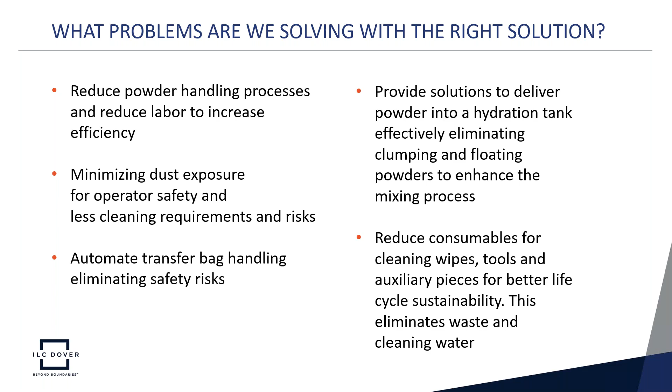Why are there different solutions for powder handling? These are some of the issues we found throughout the biopharm market. Tank sizes and elevations for access to those tanks and the charge nozzles are different. We have some tanks that are smaller and closer to ground level, while other tanks are very large and located on a mezzanine.

So we have to come up with a range of solutions for those differences. The recipes for the volume and types of media are different for each biologic, and so the transfer system needs to be flexible to meet those differences.

Powders definitely have different characteristics causing flow issues, mass flow issues, clumping of the powders, and when it comes to hydration, foaming is an issue. So we looked at that and what solutions can be applied.

Powders will have different mixing characteristics, and so we definitely want to improve how the mixing can be done and have a better mixing profile or speed of mixing.

And the biomarket continues to migrate from durable technology to single-use systems, so the different solutions have to be capable of a retrofit as we look at moving from a stainless steel type of system to a single-use type of system.

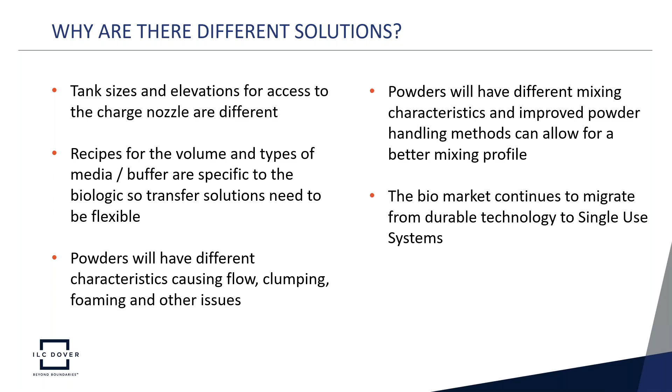So today we'll look at three different technologies that can be implemented for better powder handling. The first is the 2-ported 3-dimensional powder bag, the EZ BioPac. This is understood to be the fastest and most accurate way to dispense powders into a transfer bag.

Second, knowing that a transfer bag isn't always used, there's the technique of drum charging, where full drums are charged into a tank using a drum lifter drum inverter, as shown in the picture. Here the cone liner was developed to protect the cone as part of the drum inverter. We eliminate the butterfly valve, protect the cone, and eliminate cleaning of those components.

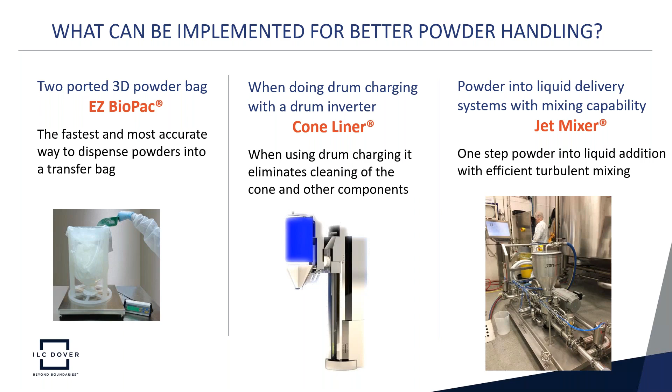And then we have the Jet Mixer, a very novel, unique powder-into-liquid delivery system with mixing capabilities. This uses turbulent mixing instead of vortex mixing, and is a very efficient and effective way to do one-step powder-into-liquid mixing.

There's often limited space, so let's look at what the operator needs. Here we have a 25-liter EZ BioPac in a very compact space, because with a 3-dimensional bag, the volume per inch of height is much greater than a 2-dimensional bag. You can see it's very ergonomic, going from top to bottom only 40 inches for the filling process, giving a large open target for filling quickly, which also allows adjustment if overfilled. The operator can remove powder very easily, no extra funnel or tools required, and spillage is almost eliminated, so we don't get powder into the environment.

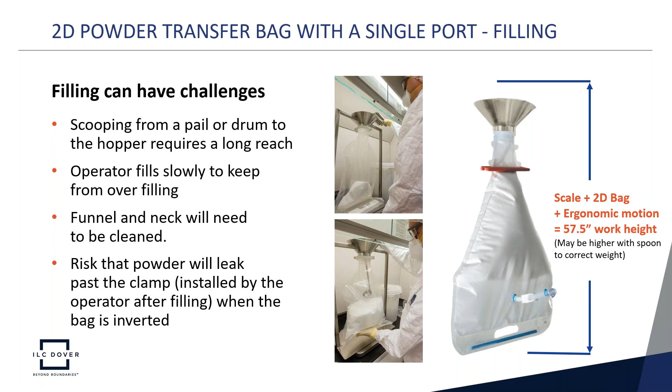Eliminating any parts, any cleaning, and any risks is all part of the powder transfer process. With the EZ BioPac, we recognize that the typical connection, almost 100% of the time, is a tri-clamp connection at the hydration tank or whatever tank it's going into.

The tri-clamp connection is a technology developed in the dairy industry for liquid applications, and it comes with a loose sanitary gasket to ensure a liquid-tight seal. But here, on the powder side of the biopharmaceutical market, we don't really have that challenge of a liquid—we have a solid, the powder, that's flowing.

So the EZ BioPac was developed to integrate that gasket as part of the tri-clamp flange. This eliminates the risk of a loose gasket—say that gasket falls on the floor, the operator probably needs a spare ready, or has to go to stores to get another one. There's also a risk of that gasket getting into the process. That's a worst case scenario, but eliminating that gasket altogether is a key point and benefit of the EZ BioPac.

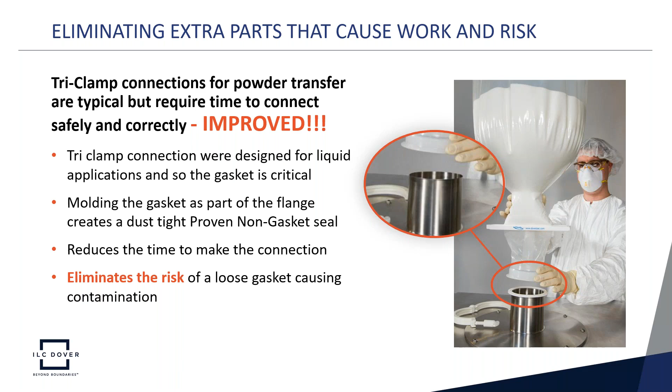Taking a deep dive into that gasket, it really is important, because we do need a dust-tight transfer of powder into the tank. We get this with the integral co-molded gasket built into the tri-clamp.

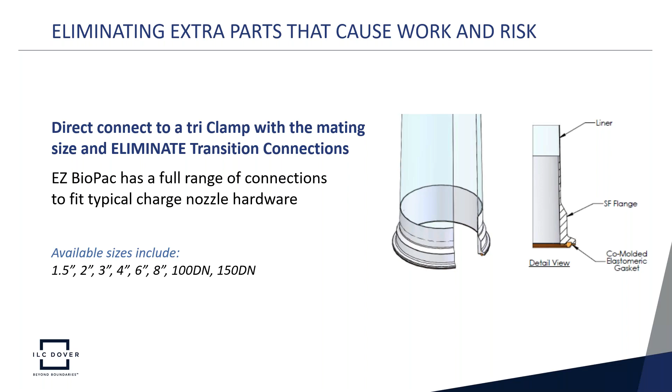The tri-clamps with the EZ BioPac are available in a full range of sizes: 1.5 inch, 2 inch, 3 inch, 4 inch, 6 inch, 8 inch, and some European standards, the 100 DN and 150 DN. This is critical because the EZ BioPac can be adapted to almost any tank with one of these sizes, without requiring any transition connection to meet the tank's size. So the EZ BioPac comes ready to connect directly to the hydration tank.

Powder hang-up and retention in the transfer is also a critical issue. When we look at the filling process, filling a powder transfer bag has a very tight tolerance applied to it. So why apply a tight tolerance to the filling if we're going to lose a significant amount during the transfer? In a two-dimensional bag, the loss is really retention in the powder bag, because of how the bag is welded together. The welds are similar to what a pillowcase would be, with pinch seam welds coming down the side—areas where powder can hang up. So why go through the diligence of a very accurate fill if we might lose 100, 200, 300 grams?

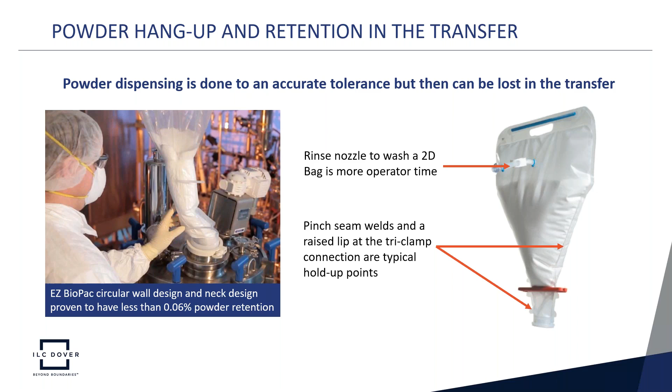The two-dimensional bags do have a solution for that, the rinse nozzle you can see here. After the discharge is done, knowing there can be some retention, WFI is connected and the inside of the bag is washed out. But that's very time-consuming and another waste in the process, making it inefficient. So we look at the two-dimensional bag as having inherent challenges in meeting the requirements for charging powders.

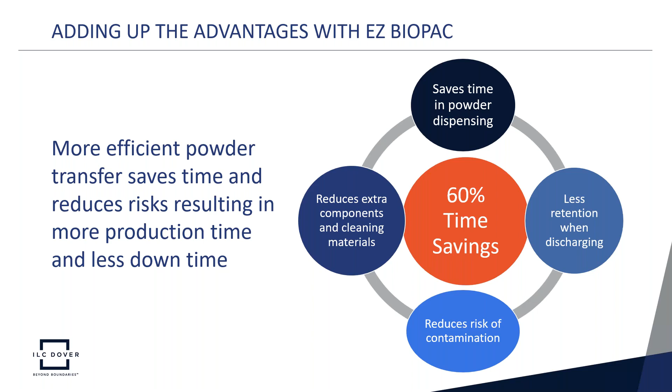So let's add up the advantages of using the EZ BioPac. We reduce extra components and cleaning materials, making the system more sustainable. It saves time in powder dispensing. There's less retention when discharging—we don't need a rinse nozzle to complete the discharge from the EZ BioPac. And we reduce the risk of contamination, or dust exposure. All of this leads to about a 60% time savings when using the EZ BioPac.

We did a case study looking at 25-liter powder bags in a batch of 50 units, comparing the EZ BioPac with the single-ported two-dimensional bag. We found a significant reduction of labor, which is a reduction in cost, which improves efficiency for additional production, increasing profits. Really, we look at it as how many more batches per month or per year, how many campaigns can be run, based on these kinds of savings.

When we look at these savings, the bottom line in our chart is the hours saved. We have 10 hours when doing a batch of 50 units with the EZ BioPac, and over 17 hours—almost double—when using the single port two-dimensional bag. So it's extremely efficient using the EZ BioPac, and that time savings can be used to increase production, which has a big impact on efficiency.

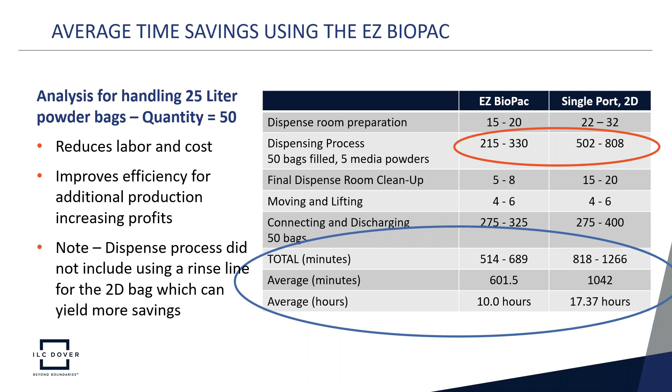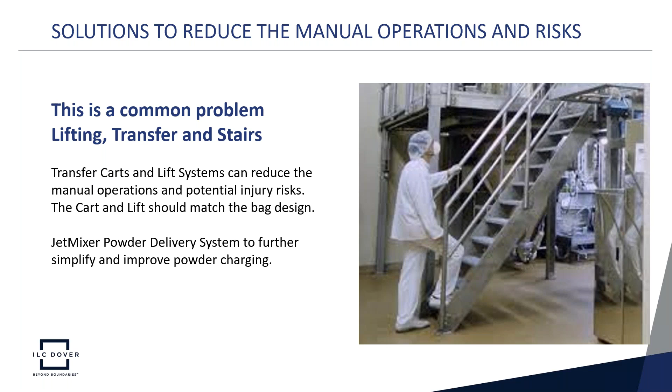How do we reduce operator risks? One way is automation of the powder handling bag system. Here we're showing an automated lift system, extremely efficient when handling multiple powder transfer bags. This system is offered by Meto Systems and has been developed to handle the EZ BioPac in a range of sizes. Powder transfer bags are brought to the lift mechanism through carts or trolleys, which we'll look at next.

Loading occurs at floor level, so we can manually load bags that are less than 10 kilos, and those are put onto hooks on the lifting mechanism.

Multiple bags are put on, so this lift can take multiple bags and lift them up so an operator can connect one, do the discharge, and while in the same area without going down the stairs, stay in that location, connect a second, perhaps a third and fourth. It becomes a very automated and efficient way to do it.

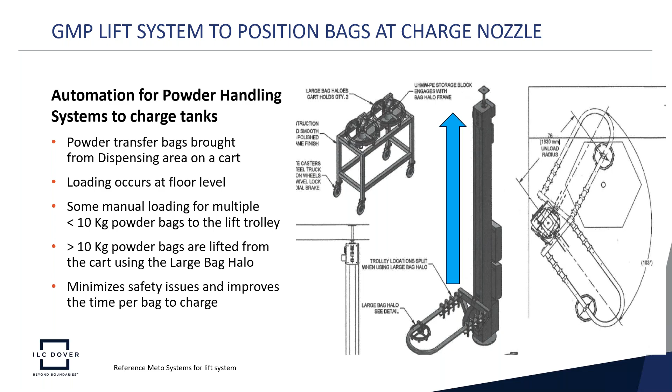Even with larger bags, we have a cart here with the lifting halo, designed to lift 25 kilo, 50 kilo, even 100 kilo EZ BioPacs to position those over the nozzle. You can see in the graphic on the far right that this automated lift also pivots into position to swing over a nozzle that may be hard to access. This is a very efficient way to lift multiple bags into position, saving the operator the time of going up and down the stairs.

Another effective way to move powder bags in the facility is a trolley system. Here we're showing a non-metallic trolley that's cleanable and reusable. This trolley can be used as a frame to fill the powder bag, and multiple powder bags can be filled and then placed in the trolley and moved through the facility. As you can see, it's a closed system, so it can move through non-GMP areas and protect the powder bags from any type of contamination as that movement occurs through the facility.

This unique design creates a trolley train, so one operator can move multiple trolleys together. These trolleys hook together so one operator can easily roll multiple units, and this becomes very effective versus the one-off movement of a cart or pallet through a facility. The trolley and trolley train has become a very efficient way to move powders into position to start the charging into a tank.

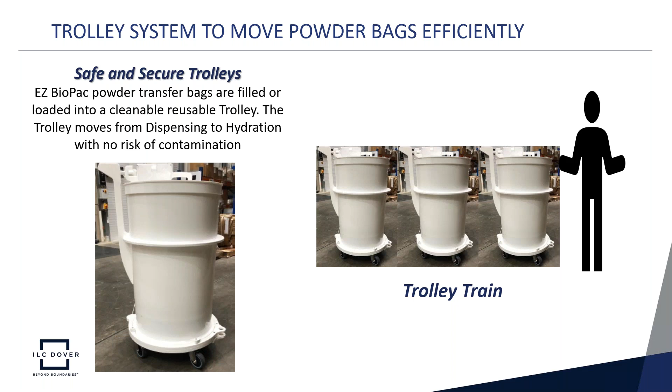We spoke about the cone liner in use of the drum inverter system. This technique was very common in the early days of charging powder in bulk into tanks using the drum inverter. It's still used, and many customers have applied the cone liner. The cone liner follows the geometry of the stainless steel cone as part of the inverter, and it also eliminates the butterfly valve, since when the drum is inverted there must be something to hold back the powder.

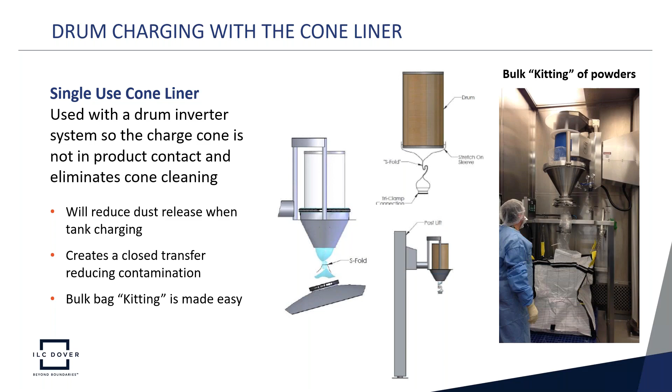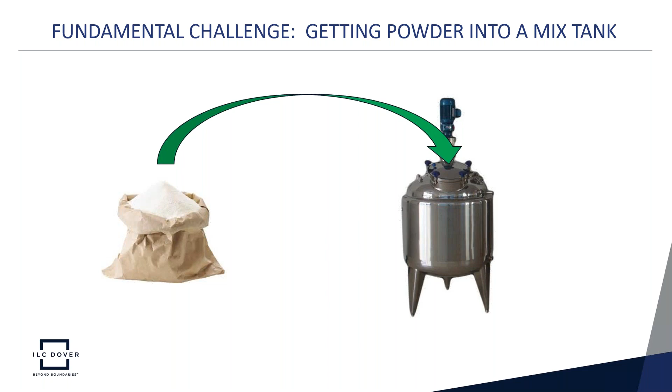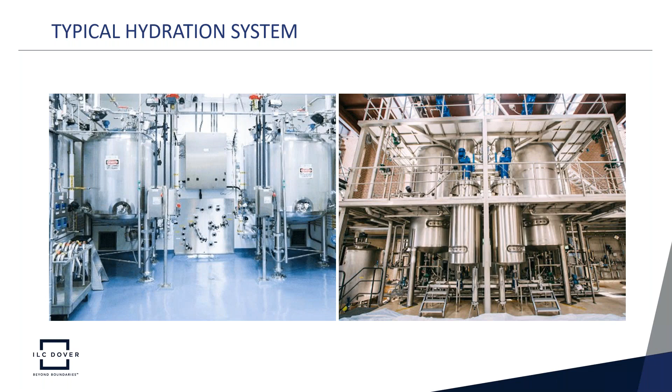Let's talk about the fundamental challenges of getting the powder into a mix tank. Up to now we've focused on the powder bag technology, which can be done effectively and efficiently, but there are other techniques. Here we'll move towards the idea of automation of getting powder into a mix tank. It's a fundamental issue, and often the tank is elevated on a mezzanine, which makes the challenge even greater. This is the typical kind of layout where we have elevated tanks, and operators have to use mezzanines or stairs to access the top of where the powders will be charged.

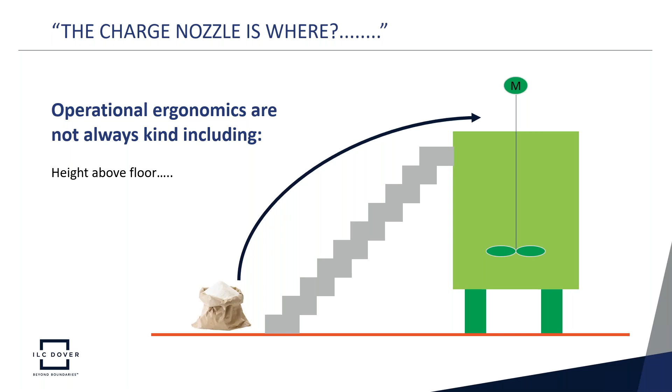We really want to eliminate that fire brigade of operators handing bags or carrying bags upstairs. Again, there are weight restrictions in every facility for what an operator can lift, so we don't want to overburden the operator with heavier and heavier powder bags. We're looking for a way to eliminate that altogether with a different technique than a powder bag. The ergonomics are clear: we want to get to the top of the mezzanine and get the powder into the hydration tank or mixed tank. Once we get up there, that can be a challenge as well, as it can be very crowded.

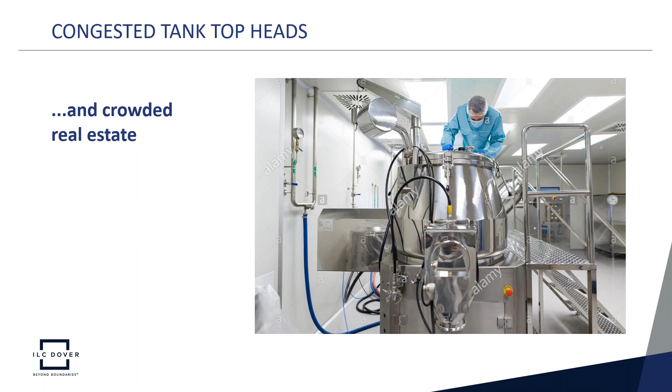There can be piping and plumbing at the top. But the number one problem we've seen in getting to the top of a hydration tank is the clearance to the ceiling. In a lot of cases, that clearance is very small and doesn't allow for a powder bag to be lifted and positioned above the tank. And in many cases, the restrictions mean very small powder bags have to be used, which means a lot of connect, disconnect, and a lot of charging that has to go on. So we're looking for a technique that can deal with this crowded real estate or low clearance between the top of the tank and the ceiling.

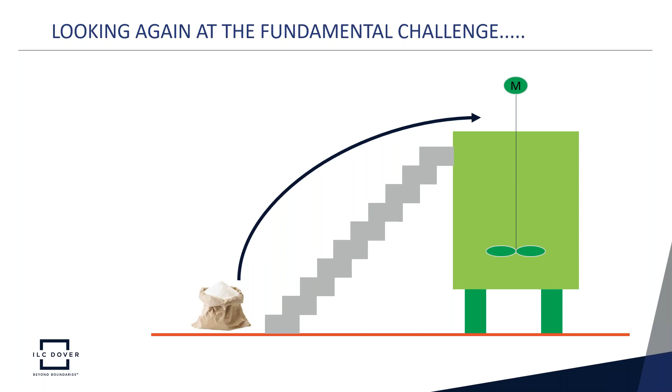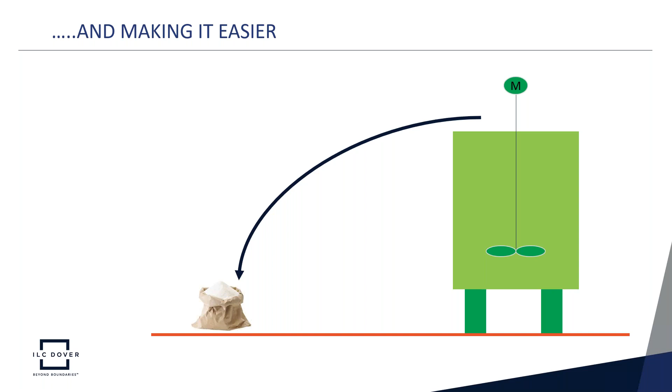So there's the fundamental challenge. How do we get the powder up there? What other techniques can we use other than powder bags? We want to make this as easy as possible and think about all the issues when it comes to cleaning, exposure, dust contamination, and so on.

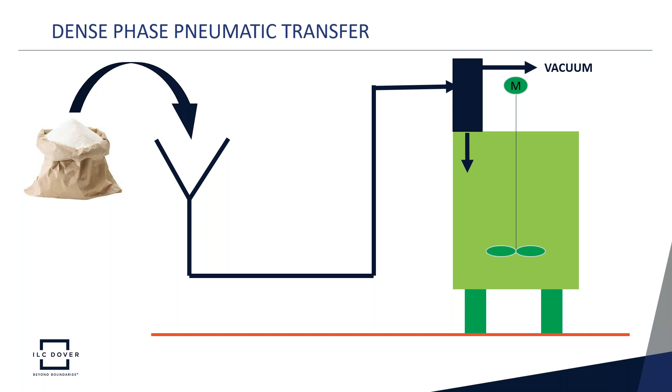So the first thing we looked at was dense phase pneumatic transfer. Can we use a pneumatic transfer system to move powder from the floor level to the tank? This is a very common process used in pharmaceutical manufacturing as well as food manufacturing when solids are used. The pneumatic transfer seems like it could be very effective, but in the diagram, all of this is piping or hosing that would require cleaning. That could be problematic when using multiple different media or buffers, due to the need to clean in between. So we found that customers didn't feel dense phase pneumatic transfer systems were appropriate for the biopharmaceutical world.

Now, again, in discussions with customers, we found a very common technique using a rotor stator device. The rotor stator can be seen as a pump, as powder delivery, or as a mixing system. But it's a very unique device that creates high shear and uses a tremendous amount of energy in the process. So we found that although the rotor stator is used in handling media and buffers to get into a tank, the cleaning required with this type of pump and the additional energy put into the system really isn't desired.

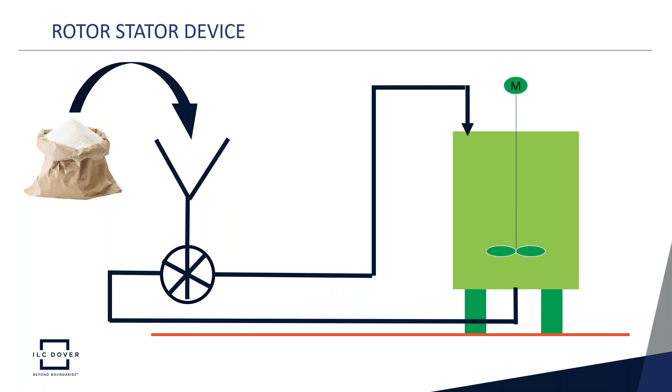So we're still looking for a better technique to do this transfer. This is where the Jet Mixer, which we introduced earlier in the presentation, can be very effective. The Jet Mixer is a unique, novel system that uses a low shear approach for effective powder feeding, while also aiding in the mixing of the process. It uses a simple pump to create velocity in water that goes through an eductor. In that eductor, a venturi is created, and with the venturi, powder loaded into a hopper is pulled into the flow particle by particle. This is very effective for poor flowing powders that have issues with flow and getting into hydration.

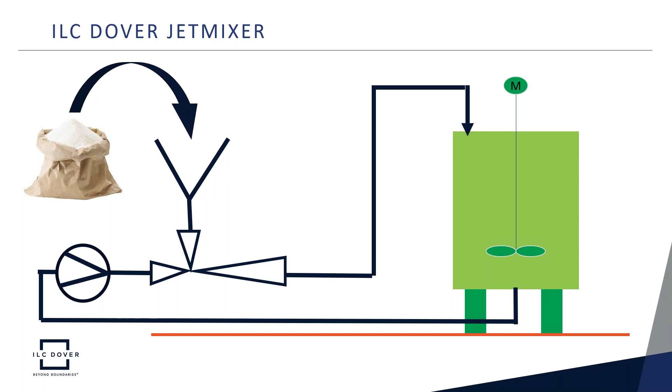We found that even when using hot water, which we've seen in processes where, say, glucose is added as a media, heated water can cause many issues getting the powder into the process. The Jet Mixer has proven very effective at meeting the requirements of those hard-to-feed materials. Also, delivery is done without any foaming occurring, and that's a big deal. Materials like soy, when added into the process, can cause a good deal of foaming in the tank, but the Jet Mixer eliminates that type of problem.

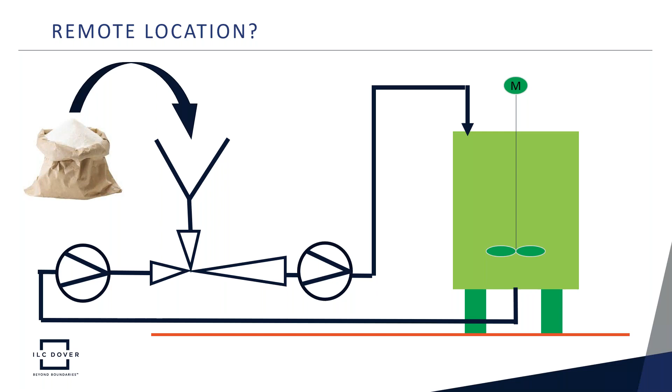And again, that keeps the environment where the mix system, the hydration tank, much cleaner, and we have no powder exposure, no dust contamination at all.

Here are examples of the Jet Mixer, with the top left being a very mobile system. In the middle, the picture is again a mobile system with a Jet Mixer located below a breaking device, since in a lot of cases media will agglomerate and become solid and need to be broken up before putting into the hydration tank or mix tank. So all of these techniques have been adopted in different ways, but you can see that the Jet Mixer can be a very compact, portable skid to meet the requirements of powder into liquid as well as liquid mixing.

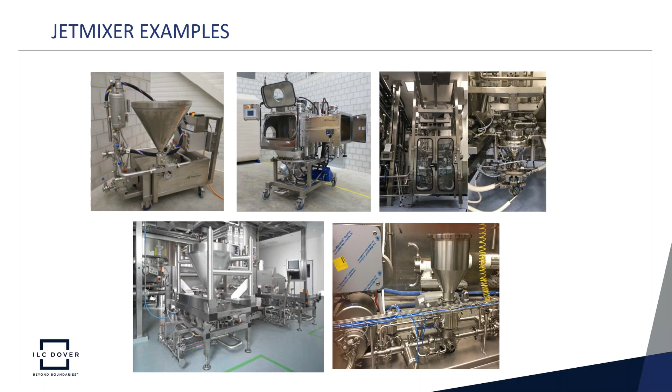Moving on, we also look at the single-use systems, and going back to the powder bag technology, this is different than handling liquids. What we found is that in a lot of cases, powder bags that are used have been adopted from what were liquid bags, including that pinch seam weld we talked about that tends to hold powder in the weld corners and so forth. Those techniques were developed for liquid bags, where retention is not a problem.

So here's where a made-for-purpose film is used for the manufacturing of the EZ BioPac. The tensile strength becomes very critical, and this film in the EZ BioPac, ArmorFlex, applies a high tensile strength and has an elongation before failure of over 500%, which is an example of how strong this film is.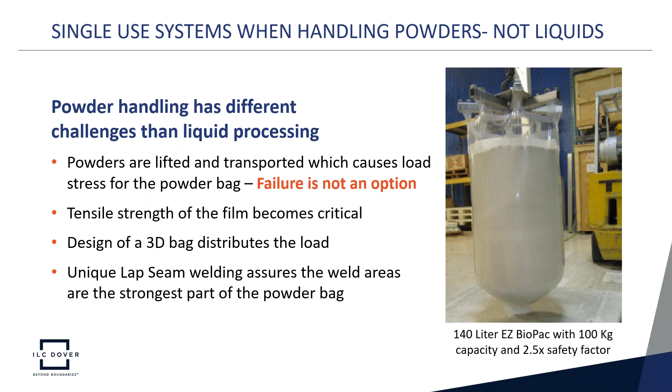So in a lot of cases, powder transfer bags have the weld as the suspect area of failure. But with the EZ BioPac, the weld is actually the strongest part of the assembly.

So with that, we can make larger size EZ BioPacs to handle larger volumes. Why is that key? For the processor, let's take the example of 100 kilos of powder charged in 4 lots using 25 kilo, 25 liter bags. That means 4 lifts, connections and disconnections have to be done. Instead of using 4, by having the capability of a very strong assembly of large volume, we can go to a single 100 liter bag, making the whole process much more effective and efficient.

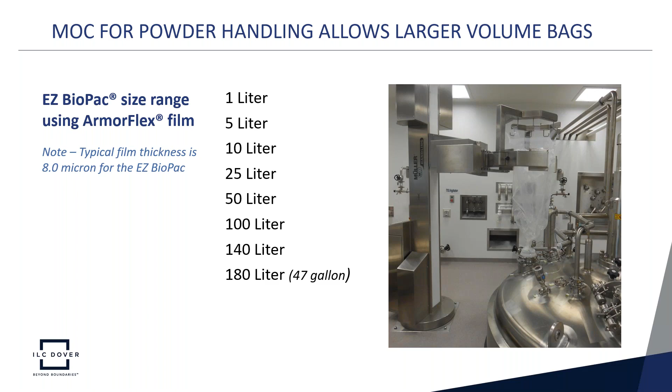So by having the materials and construction method to use a larger volume is very important. And when we look at that material, it's always key in the biopharm industry to understand if this is compatible with the process. The ArmorFlex material is interesting because it's a single structure monolayer film, a combination of linear low density polyethylene and low density polyethylene blended together and extruded as a monolayer. There's also an anti-static additive blended in, which is key for retention, allowing the powder to be released fully into the tank when charging.

Now, key in the biopharma industry is extractable and leachable testing. So this material has gone through the typical industry standard testing, such as the BPOG testing and others, to qualify for those stringent extractable and leachable requirements.

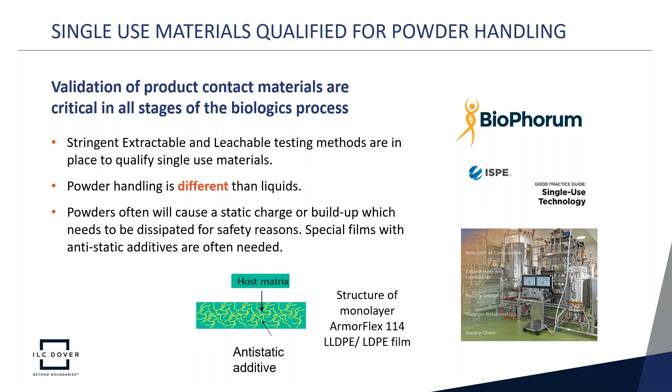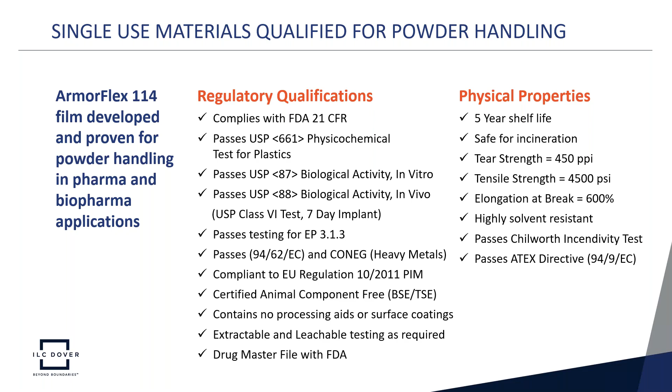The ArmorFlex in grade 114 is characterized with the regulatory qualifications as well as the critical physical properties that the material has. This film has a full range of regulatory compliance, and individual extractable and leachable tests are done by companies themselves or by following standards in the industry like the BPOG extractable and leachable protocol.

These powder transfer bags have to be manufactured in an environment using a material that is characterized correctly, and the manufacturing has to be done in a clean room. The ArmorFlex is manufactured in ISO 7 certified clean rooms, which are also certified to ISO 11137, the VD Max protocol. With bioburden control, we can manufacture the EZ BioPac and then go through a gamma irradiation process and have certification for sterility. So this is key: not only the ISO 7 certified clean room, but also the ability to gamma irradiate and have a sterile product when needed.

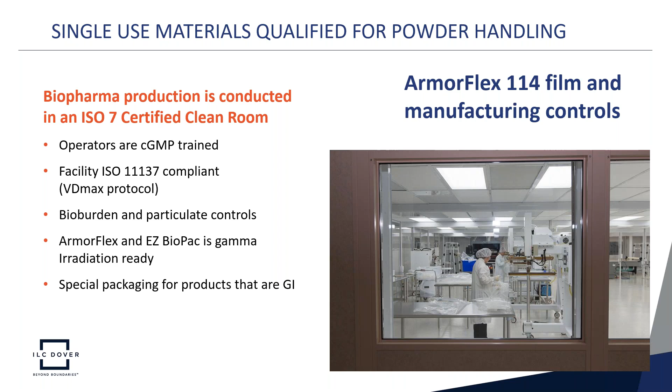Here's a quick case study of a company that implemented the two-ported three-dimensional EZ BioPac. Some of the cell phone pictures weren't the best photography, but it tells the story anyway. In step one, the customer was using stainless steel bins to move their powders through the facility.

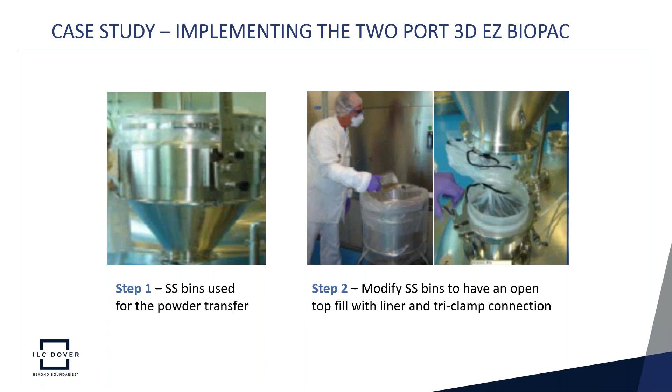From the dispensing room to the hydration tank, in step two we wanted to modify those stainless steel bins to have an open top with a liner and tri-clamp. That was the first step to try to move away from stainless steel bins that required a significant amount of cleaning.

As we went forward, the process moved into step three: we eliminated the stainless steel bins altogether and used lightweight frames to hold the actual EZ BioPac. This is where the EZ BioPac began its use. In those frames, the EZ BioPac could be filled and transported, and in step four, the EZ BioPac is lifted independent from the frame and then charged into the process.

This eliminated a tremendous amount of cost in cleaning those stainless steel bins for the company. They were also going through an expansion and would have had to purchase a significant number of bins, requiring significant floor space as well as additional cleaning equipment like washing machines. So there was a dramatic CapEx savings by going to the EZ BioPac instead of the original stainless steel bin technique.

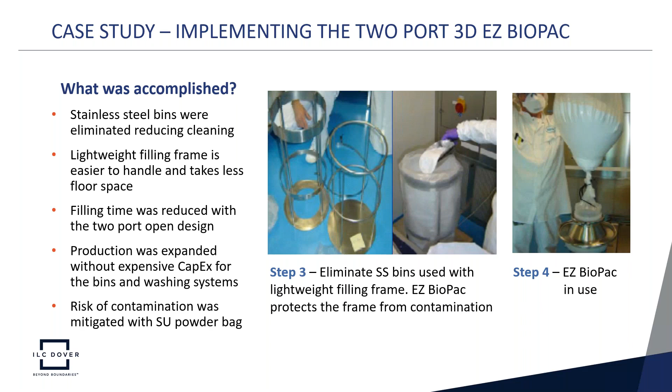This is one of the challenges, and why we have different solutions for powder handling: in this case it was a retrofit of an existing process. So we needed a way to do it basically the same way so the SOPs aren't impacted much and change control isn't that complicated, but still get the job done by using the EZ BioPac.

In summary, what we've presented today is that biopharm powder handling is not the same in every facility, and we need to look at options available to meet each demand. The two-ported three-dimensional bags are purpose designed and built for powder handling. The EZ BioPac was developed specifically for handling powders, not as a derivative of a liquid bag process. Lifting systems are very effective and can reduce operator manual operations, protecting operators from the risks of moving powder bags around.

Powder into liquid can be solved quickly by using the JETMIXER, a very effective way to get powder into liquid and start the mixing process. Materials of construction are very critical; qualification and performance always need to be considered when using a single-use product. And looking at the business case for using the right solution, whether it's a facility upgrade or better performance, in that short case study we saw a dramatic savings the customer realized in CapEx as well as operational savings by no longer having to clean those stainless steel bins.